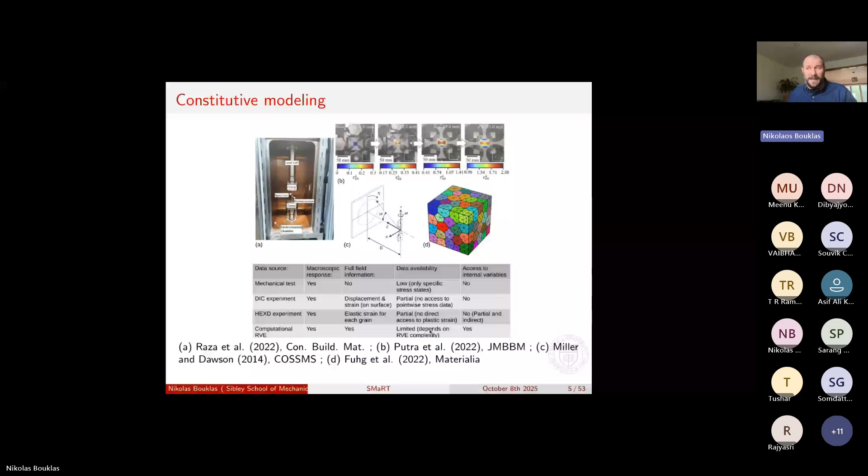So now when we started on this topic 6-7 years ago, especially the data-driven approach, and I'm saying that this was maybe a naive approach that we had at the time, was that we were trying to map strain to stress. This is the second Piola-Kirchhoff stress, and this is the right Cauchy-Green deformation tensor. So we wanted to learn this major mapping, to learn this closure, right?

Thinking that we have some information between stress and strain data pairs, and we actually want to just use this data to run finite element simulations at the structural level. And now you could also learn the minor mapping, which has to do with a consistent tangent, right? And we were mostly thinking of having a computational RVE. So this is how we started, right?

So we thought that we had a system where we could generate pretty much any type of data that we wanted. And even though the elephant in the room is always, how much is that going to cost? How much time is that going to take on our server to generate all that data? And then at the end of the day, we end up with n samples here that have strain, stress, and the tangent information.

And we started trying many different methods, right? And maybe our implementations back then were not as mature as they are today. But we had started with k-nearest neighbors, artificial neural networks with gradient information as well, Gaussian process regression, and here specifically this was a flavor of local approximate Gaussian process regression, where depending on the neighborhood in strain space we would construct a local GP.

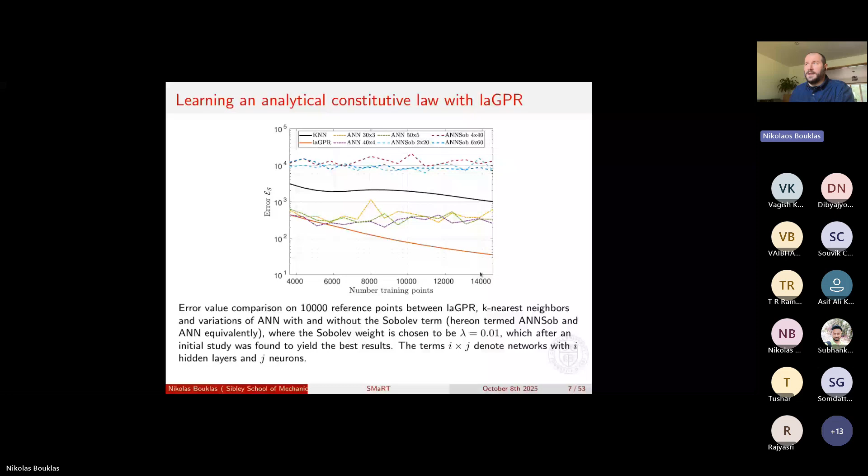The deficiency is obvious: do we actually want it to converge as we go to higher and higher data points? Should our goal be to handle more data? Because as we said before, the elephant in the room is that we usually don't have all that data that we want in mechanics. And then once we learned this with this local GP, the point was also to pass it to finite elements. So we had to figure out how to make these

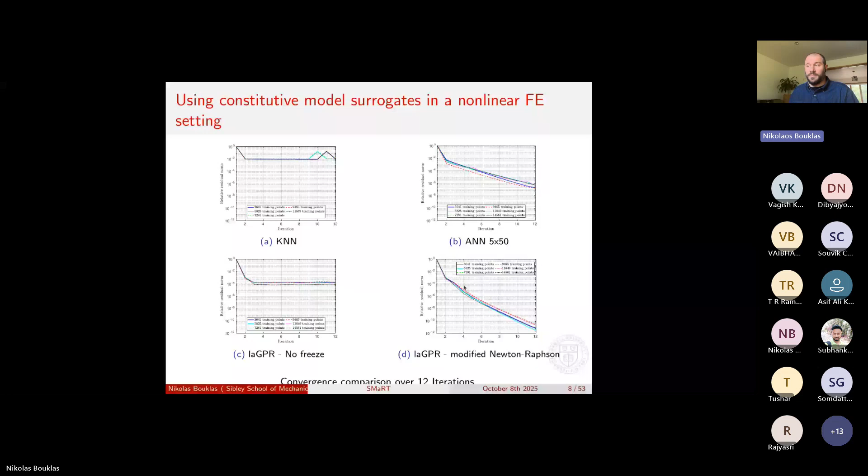to see convergence if you try to do a Newton-Raphson iteration at a Gauss point. And we saw that we were having some challenges for convergence with k-nearest neighbor and neural networks, where we had some linear or sublinear convergence. With our local approximate GPR, again, this was freezing, so we had to modify our Newton-Raphson scheme, freezing this local neighborhood after some point. So we just had to stop updating the local GP to obtain some linear convergence.

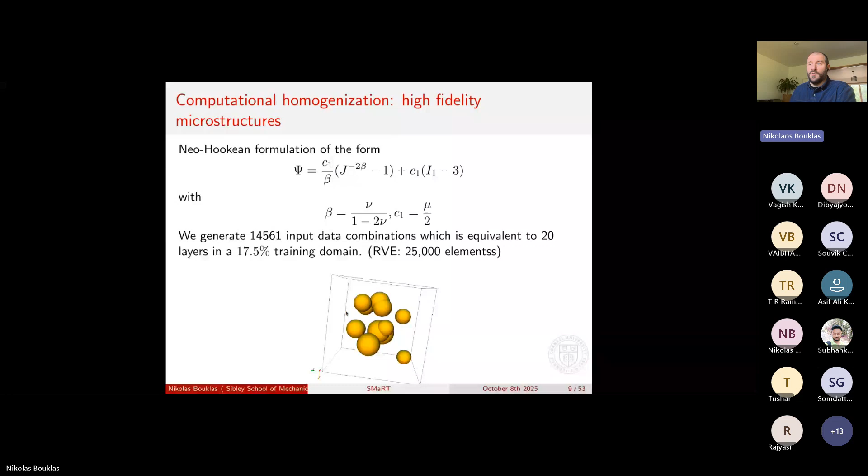And then we trained this also on RVEs that had 25,000 elements for some particulate two-phase microstructure, and we trained in an almost 20% training domain. So all the components of the deformation gradient could change by 20% about the undeformed state, and we considered the two phases, both the matrix and the particles, to be Neo-Hookean. And we had our server running for a couple of months, generating all that data.

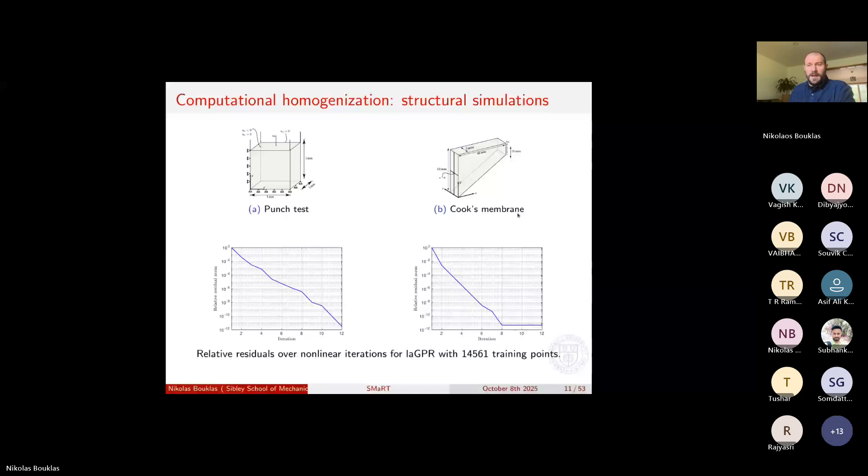And at the end of the day, we were able to run structural simulations that showed convergence between linear and quadratic for standard tests in solid mechanics, for the punch test and for Cook's membrane. And we were pretty happy about it. But should we be happy with this? Because there were a lot of things that we neglected, right? So we forgot about the physics as we were doing this.

So if we're in the context of hyperelasticity, we can repeat the Clausius-Planck inequality that now becomes an equality, and this requires the second Piola-Kirchhoff stress to be written as a sum over derivatives of the free energy density, which in turn here is a function of the right Cauchy-Green deformation tensor, and also these structural tensors, A1 up to AP.

These structural tensors, in the context of anisotropic hyperelasticity, describe the character of the anisotropy of the material. And they have to do with the directions of reinforcement. For example, in a transversely isotropic material, this A1 would just be the dyad of the direction of the fibers with itself. And then what we have here in the sum is the derivatives of the free energy with the invariants, right?

And here we have the mixed invariants, right? We have the principal invariants of C, but we also have the mixed invariants that come up with the combination of C and all the different structure tensors A. And then we have the derivatives of the invariants and the right Cauchy-Green deformation tensor. And here you see that this is a scalar quantity and this is a tensor quantity.

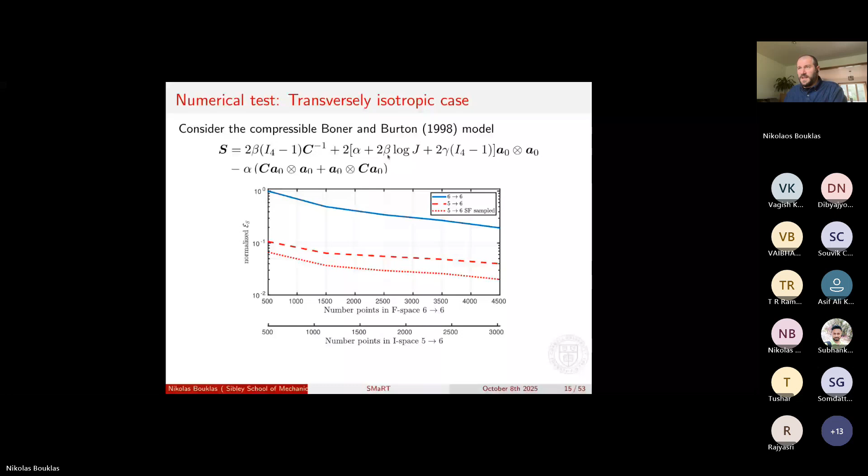Now, similarly, we started with this from hyperelasticity, and we thought of how to extend this to elastoplasticity as well, which is a history-dependent problem. So here the complexity comes from considering history, where now we can have a split for our elastic and plastic strain, and then we have our free energy in an elastic and a plastic part, considering a set of internal variables, and now we have our dissipation inequality, considering the rate of evolution of our internal variables and their thermodynamic conjugates.

And now defining a pseudo potential also, we could get the plastic flow rule, and to maintain thermodynamic consistency, there are some restrictions to that pseudo potential. It has to be convex with respect to its arguments, positive at the onset of plastic flow, and fulfill the condition that it is increasing. So it is going to be larger than the state that it had at the beginning.

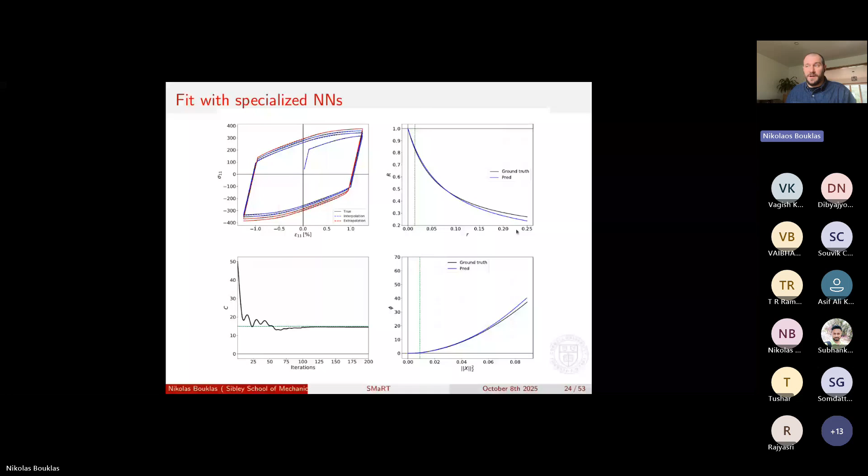And we see that, again, what we managed to do is we managed to learn something that extrapolates proficiently. Whereas if we did not constrain thermodynamically all these functions, the learning within the convex hull of where we have training data would again be very good. So here you would have a very good fit. But the moment you would try to get out of this regime, everything would fall apart. So the moment your loading conditions are slightly different than what was occurring during the test. So we saw that if we didn't add these implicit biases and these strong constraints, you would just be able to interpolate. There would be no extrapolation capability.

But actually, all the developments from the School of Rational Mechanics are done for this reason, right? So mechanics was always learning, right, with phenomenology, was always learning from low data, right? This is what mechanics was always trying to do.

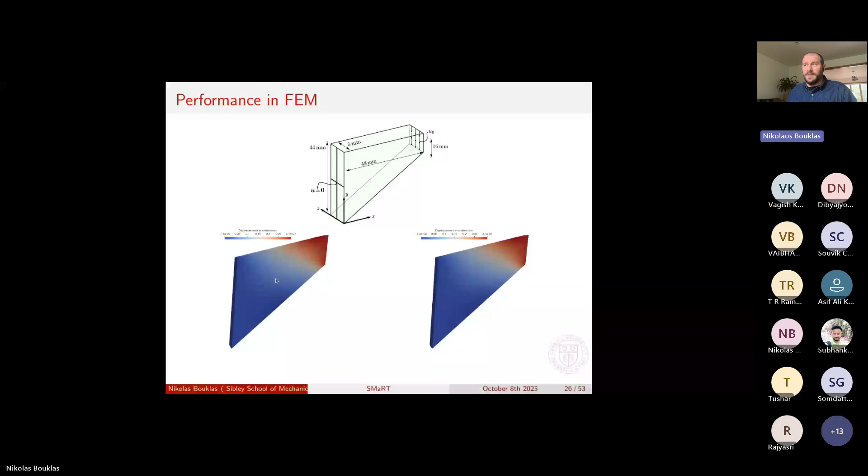So then what we do is that we also take these constitutive laws and we can run them now in finite elements. And because these have these convexity requirements already embedded, they actually run very, very well in finite elements. I'll show you. Here we had, again, Cook's membrane, one using the phenomenological model from which we created the training data, and one the data-driven model that we learned. And we see that if we look at a Gauss point and look at convergence during the Newton-Raphson, this behaved very similarly, right, for the phenomenological model and for the proposed approach.

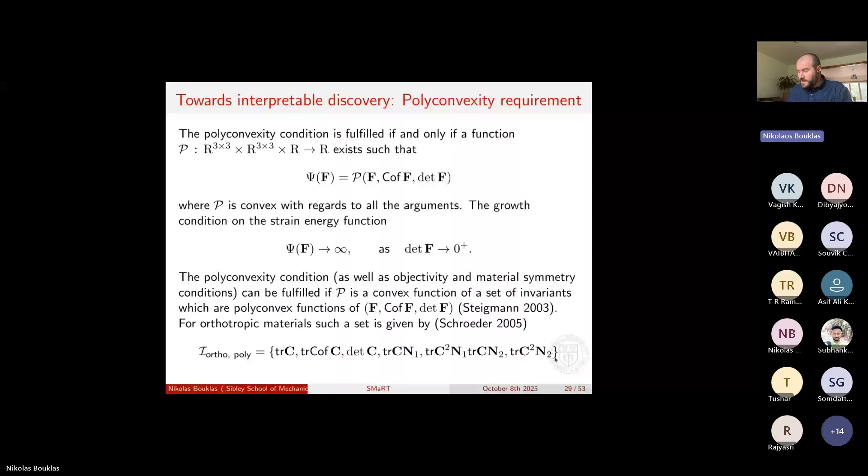And here you have pretty much embedded a library, but without choosing actually any library. The library is these hierarchical functions that show up due to the architecture of the neural network, and they have to do with the activation functions that one uses and the architecture of the network itself.

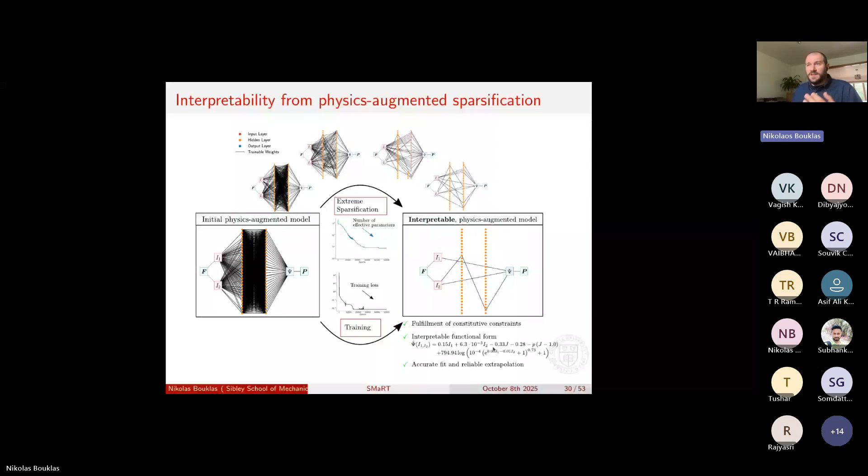So here, this is, for example, the free energy that we have for an isotropic case with respect to I1 and I2 for incompressible hyperelasticity. And we do this also for rubber data sets to extrapolate between different, here we have pure shear, equibiaxial testing, uniaxial testing, and we're able to extrapolate between these.

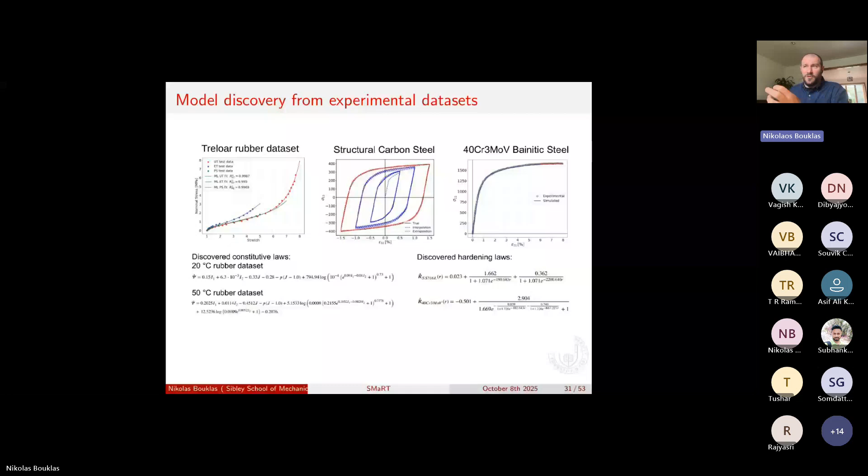We do it for steel, we do it for these hardening laws, and you see that all these expressions that we end up with are very concise. This enables the fact that you can very easily run them also in commercial software, and also you can interpret them much easier.

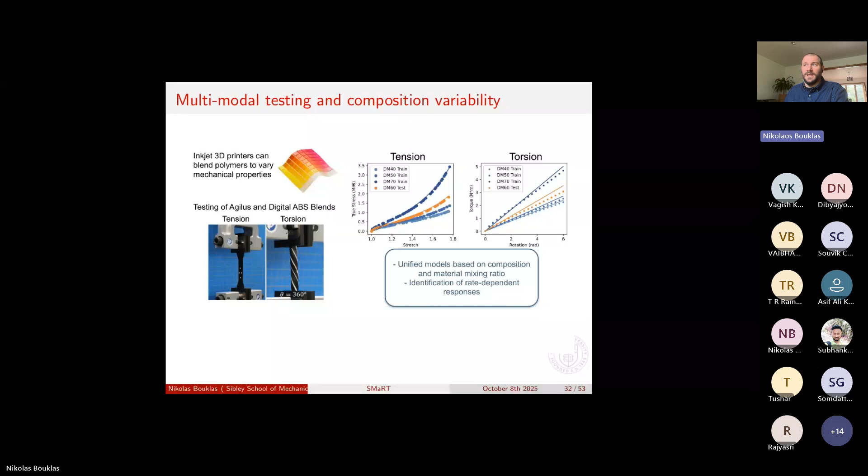Now, we also do it for multi-material testing. This is some multi-material 3D printing, where we also learn from multimodal tests in tension and torsion. And then the next step is to learn from imaging data, right? So, and we're thinking to accelerate that,

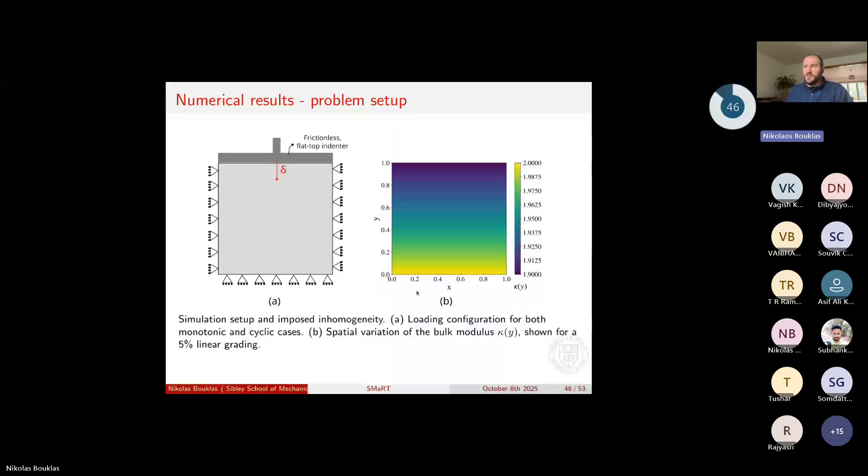Of course, here we didn't add any imperfections. And then this forms a front and completely overtakes the specimen, and then it goes into densification. So we see elastic, plateau, densification. And we see that, as we bias this to make it, for example, softer and softer on the top, so here we grade the material properties, we see that this can localize in one specific region.

But as we'll see afterwards, what has to do with this is that the properties of these materials, because they have this architecture, they are prone to being sensitive on local properties. So what we can get with these types of models is we can get hysteresis loops. For example, here we densify, there's a front forming at the top, the front propagates, so we have this complete phase transformation. Then at 6, we are densified, 7, we are fully densified.

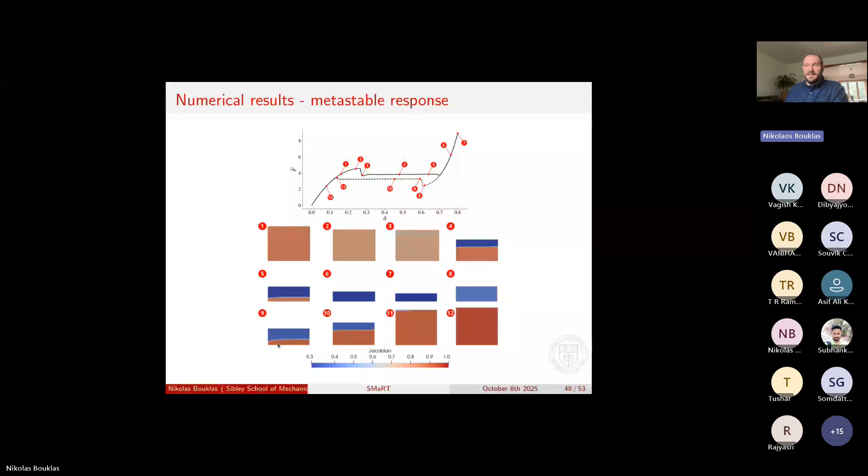Then we start unloading at 8, again homogeneous. Then at 9, we have the backwards transformation, and we create this hysteresis loop. And here we don't add any perturbations, right? And if we use a different type of model for our non-convex part of the free energy, we end up with a bistable response, which means that we load, get to the plateau, densify, and then coming back, we find another minimum, right? So here, even though we remove the force, we are at this fully densified state.

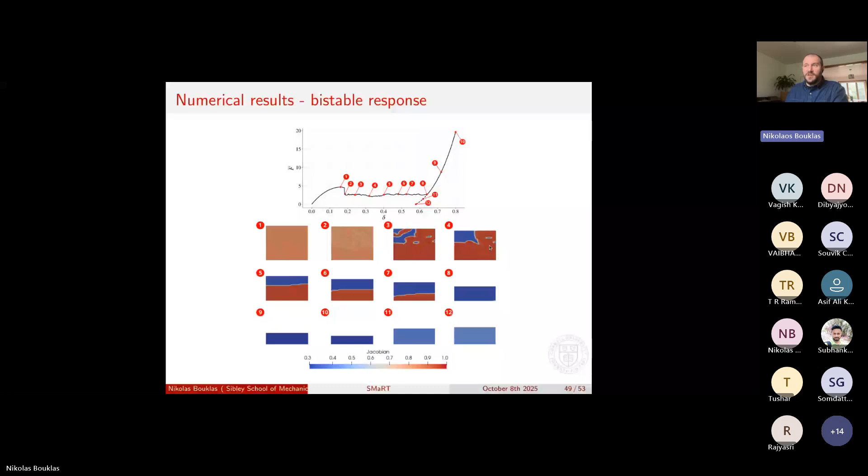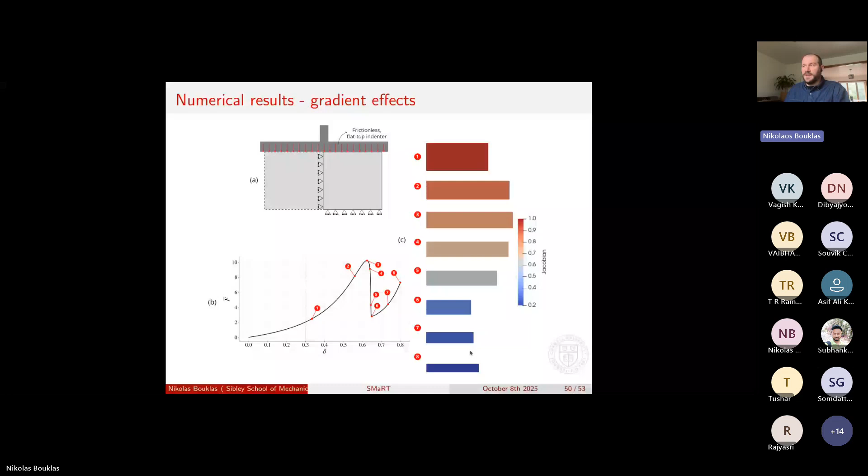And here we saw that there's a more complex localization behavior for the formation of the initial state of the phase change. Some other things that we can capture is these global instability responses that we can control as we change the length scale to get globally coordinated instability modes. For example, here you are compressing and you see the Poisson effect, but as you keep on compressing, then you see an auxetic effect where this retracts, and then once it fully densifies again, this starts. So this is only compression, right? And you see the Poisson effect, auxetic effect, and Poisson effect again.

And for example, if we look at different levels of polydispersity in these materials, we see very different responses. So here we saw that for some limited polydispersity, we had this response that still shows a limit load, but as we increase the polydispersity we see many more bands forming in this material, let me play it again. You see many more bands forming in this material.

I'm not sure if you're seeing it very well right now. Yeah. Let's hope you are. Yeah. The videos actually did not play around. Can we play it once more, Nikolaos? Yes. I'll stop it for a second just to see the bands forming here. Yeah, it works now, I think. I see it very granular on my iPad, right?

So you see these many bands that are forming here. And when these many bands form, we see that the peak load actually is removed. So here, there's almost two levels of, and I'll stop the other one to see that here on the left, pretty much one big band formed. So here, as one thinks of problems like this for machine learning, one has to understand that it's not just the constitutive law that one picks, but it's also the distribution of material properties. It's the selection of the length scales that come into play.

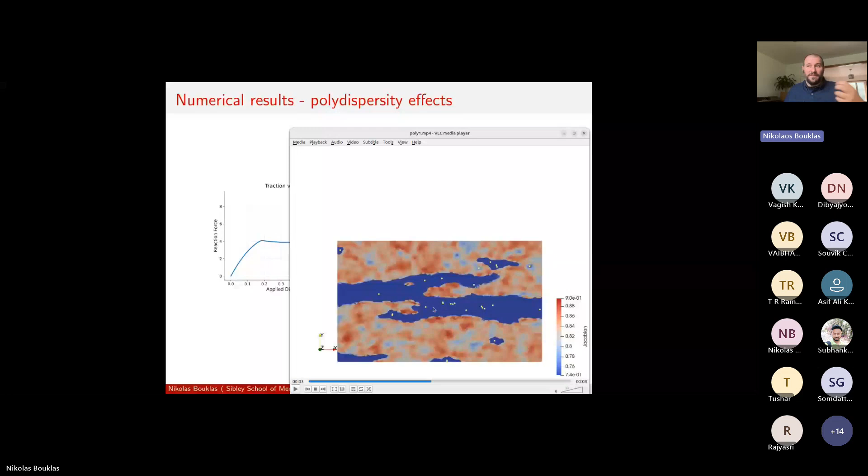So I think that some of the problems that we have, and there's many problems that are like this, right? For example, fracture, cavitation, instabilities. As we try to tackle more complex problems that are multiscale, for example, this is a continuum model for something whose behavior is governed in a multiscale sense, there's more and more open questions for machine learning, right? So this is not some trivial ML extraction of just the simple closure. This has to do with identifying length scales, identifying spatial variation of material properties, identifying the underlying constitutive law. So our next tools that we're developing have to be able to tackle these problems that become more and more complex as we want to uncover more and more complex behaviors in architected materials.

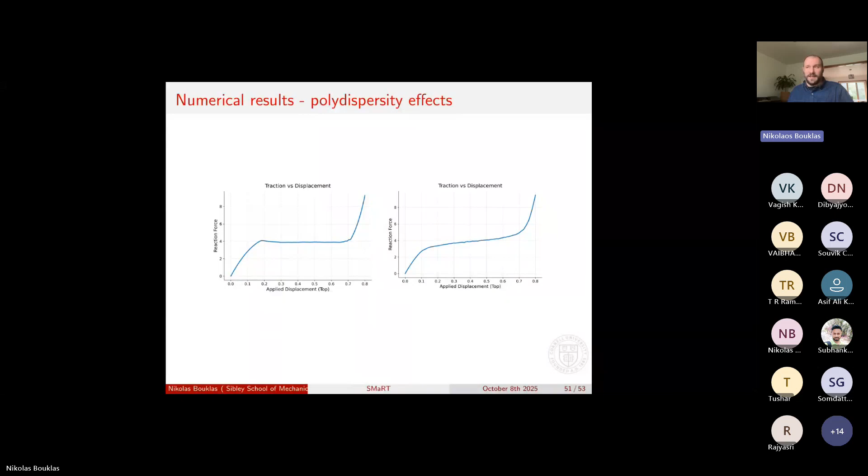So just to close this, we explored the possibilities for constitutive modeling and closures for solids with machine learning while our main goal was to maintain trustworthiness. We explored the low data regime and balance between generalization, interpretability, and expressivity. And this was all for local models where we didn't see instabilities, we didn't see localization, we didn't see complex responses. We saw some richness due to the non-linearity of the processes that we were trying to capture, though that is non-trivial.

But then as we looked at more complex materials like architected metamaterials, we saw that there were effects like local densification, microscopic instabilities, hysteresis loops, multistability, polydispersity. So these types of problems now open up another set of questions that we have to see how SciML is going to answer in the next few years, and how we can develop robust and efficient approaches.

For example, can we combine some elements of what we developed from model extraction from DIC, these transfer learning approaches, to close the loop as one tries to understand architected materials and model them at scale? Because so far, what we have is that people, for the most part, develop discrete models for these architected materials, which end up being very limited in size with respect to what one can model. And if you do homogenization in this case, especially from a local approach, then you cannot capture localization in a phase front because your periodicity assumptions mean that there's multiple fronts actually.

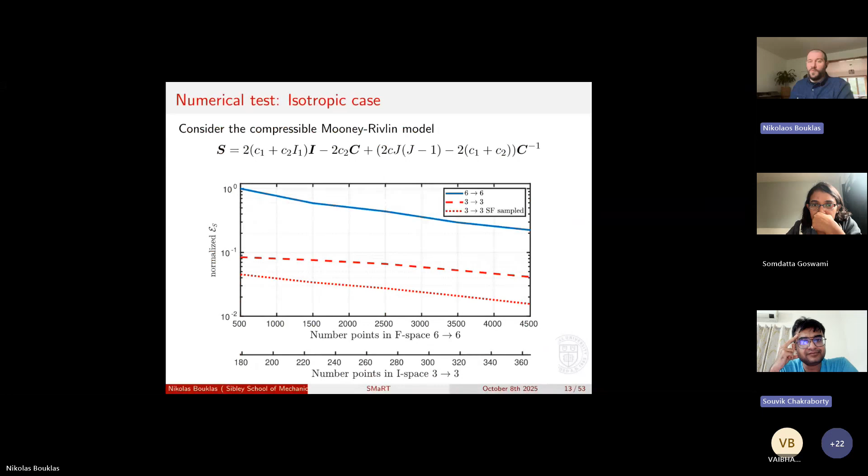In the first part, where you're using the GP and GP was giving very good results, were you also capturing the uncertainty and trying to propagate that, or were you only interested in the mean? No, we were not doing that at that point. We were just doing it for zero noise, for example.

More recently, to answer this question, with Govinda, we went back to thinking about GP and thinking about Bayesian approaches to propagate uncertainty and to keep track of uncertainty in these models. And we have recently been doing some work with interval approaches actually, which convert this problem from a probabilistic to a deterministic setting, for example, trying to find an upper bound and a lower bound.

The problem is that in mechanics, for example, if you have a uniaxial tension and a biaxial tension test, you still might have some noise in these tests. When you do it in a Bayesian perspective, and you think about the invariant space, your data now lie on two lines in invariant space from these two experiments, and then the uncertainty is really growing in between these experiments. Whereas sometimes what we want is to actually interpolate the uncertainty bounds from the experiments that we know.

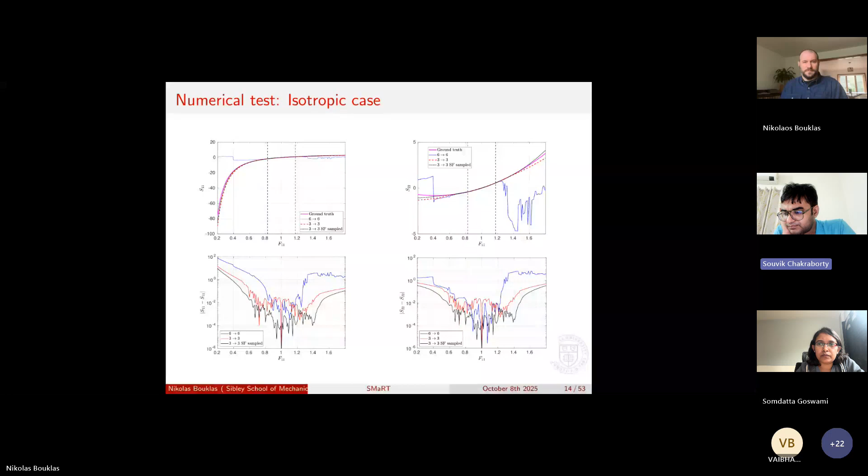Now regarding the plasticity part, right? So in plasticity, one of the problems that we are recently facing is when we are trying to model the softening part. At least with FE, the softening part, its convergence is a big headache. Yes, in short. So do you see some way that neural networks can help in accelerating that, at least the convergence of the softening part of the elastoplastic model? I don't know.

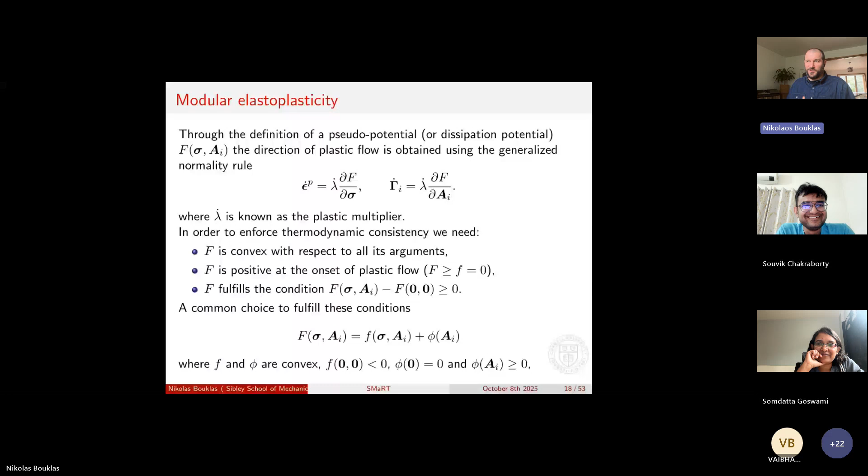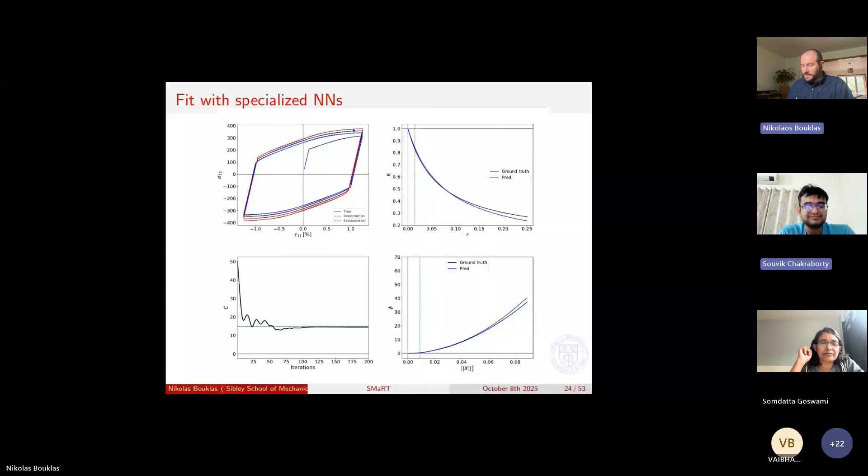No, I think that's a good point. That's a good point. So that was pretty much the whole point of this talk, to say that, okay, we've done all these things where I show these plasticity responses, and this is for things that are prevalent in mechanics, but also you see that the problems that we did in this first part are not the harder problems, right? In what I showed for architected materials, you see the responses are way more erratic. For example, you go up here, something goes down, then you have a plateau, then it goes up. Things are much more complex, right?

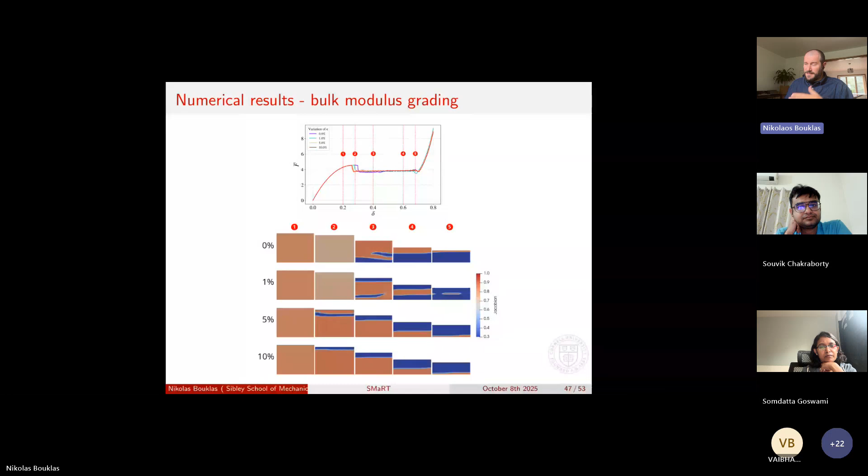So when you have localization, this, for example, is something where you might have to set up with a gradient model, try to find that length scale, so once you start thinking of these non-local models, the behavior is regularized, okay, and you don't have mesh dependence, you don't have other issues, so this is one way to go about it. For example, in what I showed here,

plasticity, we assumed that the function that we were learning for R, this R of R, was positive and monotonically increasing with respect to the output. This was because you're thinking of this isotropic hardening as a balloon that's growing, right? And we only allow it to keep on growing. But for example, if you drop that, you also allow it to retract. But then there's other considerations in the thermodynamics as well that one has to take into account, right?

So for me, this is the next step, right? Going away from just fitting things that are stable and well behaved to fitting things that are unstable and actually are the critical questions in mechanics. Yeah.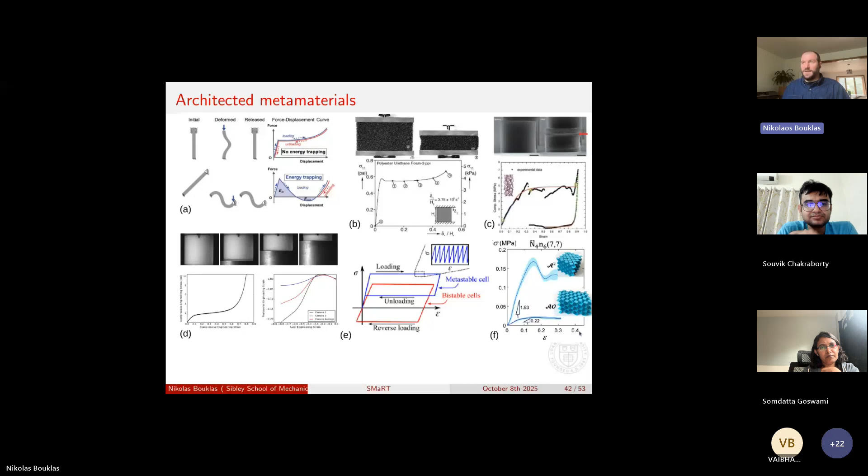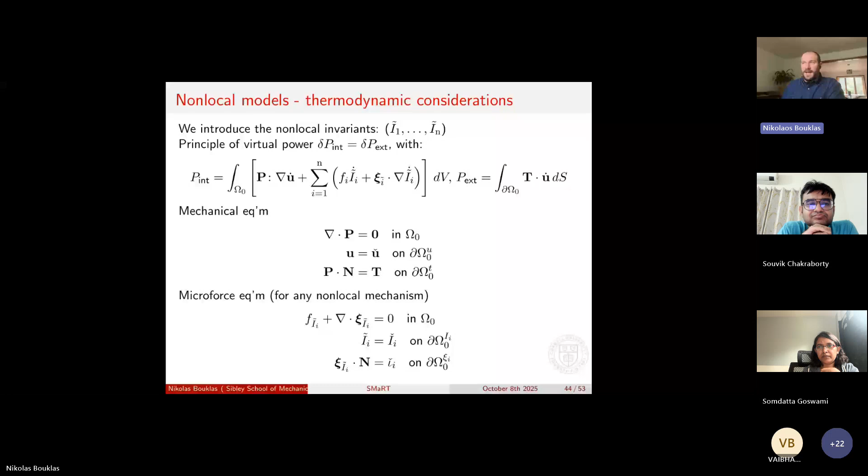For example, the model that I posed here, even though I start with a more generic setup for these non-local mixed invariants for anisotropic hyperelasticity, the model that I ended up with had just J tilde, right? Which meant that I didn't have any transverse anisotropy or I didn't assume any strong anisotropic character. We just had isotropy. But go ahead. Right. I just wanted to mention that.

Yeah. And you are only learning the response, right? I mean, you are not worried at this point about designing. Say, how should I fold it to get a target property or something like that? Absolutely right. But some of the things that we're doing now is trying to learn, for example, energies that govern the instability based on microstructures. Okay. And then if you start understanding that, then you can go with some adjoint approach. You can also go back and do design if you have some target properties like what we showed before.

So these are some problems that I find interesting these days to go forward and push. I think all the tools that we have developed are really going to help us learn in a more robust way.

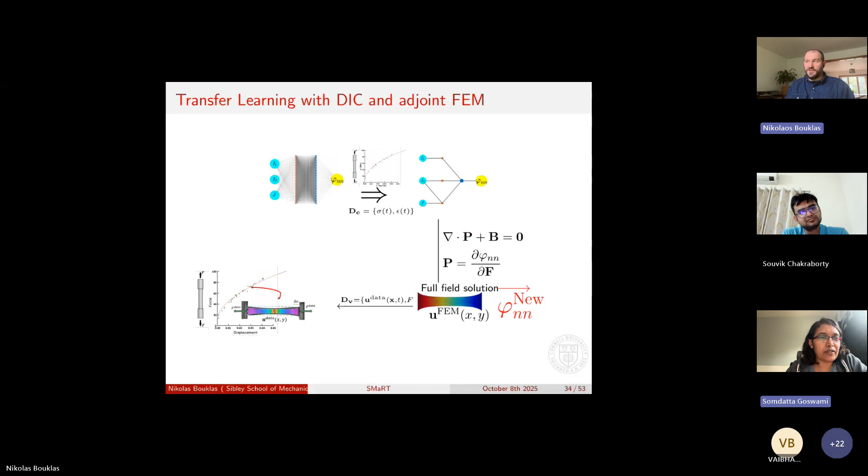Okay. If we don't have any questions, Nikolaos, I just want to quickly ask you about the transfer learning framework that you presented. In this one, what I understand is that in your training of the transferred model, you are retraining with a very small amount of data. But are you changing anything in the network or anything in the loss function that you're adding? So here I didn't talk about it just because I was brief.

So here, for example, I showed this simple case where I say that in the pre-training we end up getting a very simple expression, right? So this is our network now, okay? And you see these hierarchical functions that show up due to the architecture of the network. But this is the sparsified network now. This phi NN is actually the analytical expression from the sparsified network. Now, we are actually working on some schemes on how to enhance it. For example, if you see that this is not behaving well, what do you do?

So then, instead of going top down, which is this direction from something that's over-parameterized to something that's sparsified, we go the other way around. So how do I actually enhance this analytical expression? This network actually is a library of functions that are very, very similar. You can think of something that goes directly to the output, something that passes from an intermediate layer, some things that connect. So you can construct these families of functions to enhance, right?

And we are thinking of an Occam's razor approach with one of my postdocs, Kira, who's in the lab, and we have some results where we actually enhance this. So even though we go to 7 parameters, we then add some more. We can keep on enriching this model if the results are not satisfactory. But the interesting thing is that still you don't need to optimize in a 1,000-dimensional parameter space. You would be at 7, you would go to 10, 13, 15, 20, right? And we see that there is some improvement.

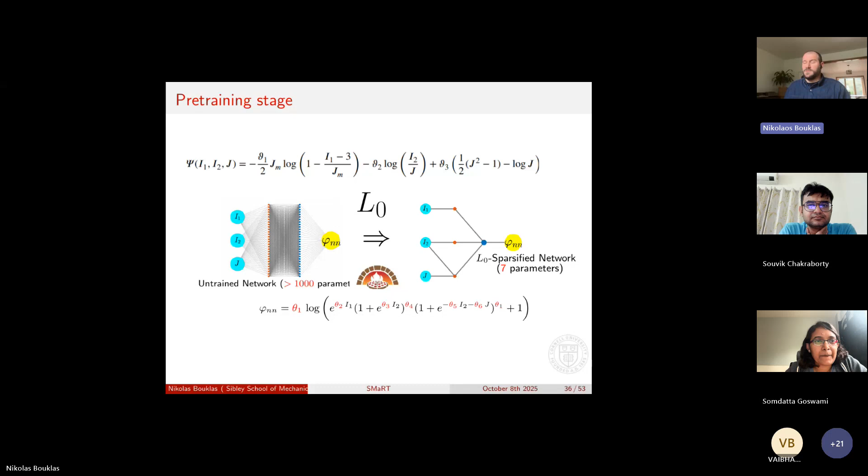But we were happy that this was actually working so fast, because the problem here is that you have to solve an FE every time, right? And this was actually a history-independent problem. But as you go to history-dependent problems, for example, if you try to model plasticity or viscoelasticity, you have to integrate over the history to match the response. So this is why we are thinking of this transfer learning approach instead of learning from scratch. But I think Souvik has some work also in this direction where they're learning directly in the full dimensional space, and as the tools are improving, maybe these become more efficient as well.

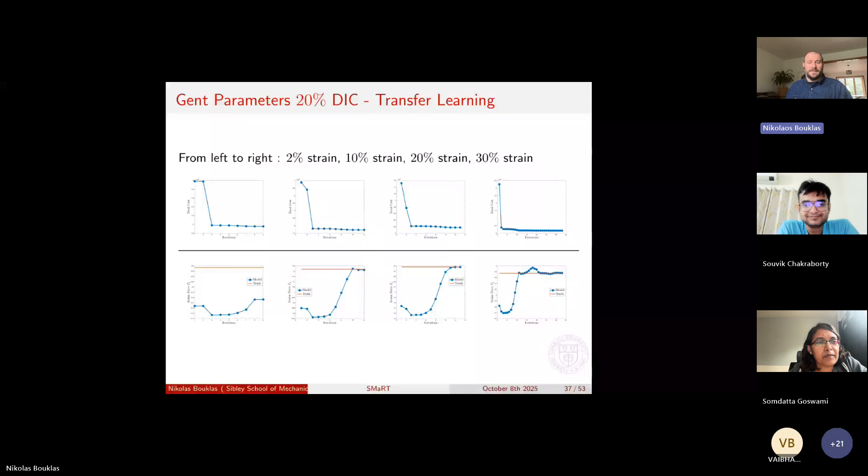I saw that Sid Kumar from Delft the other day posted a really nice paper where they are discussing a new finite element implementation where everything is vectorized, the assembly is vectorized, you don't go into loops. Yes. And I think that developments like that are super interesting on where the future of finite elements and the connection with SciML is intersecting. So if you haven't seen Sid's paper, I recommend you check it out. It's very nice. I think it's his latest arXiv. Yeah.